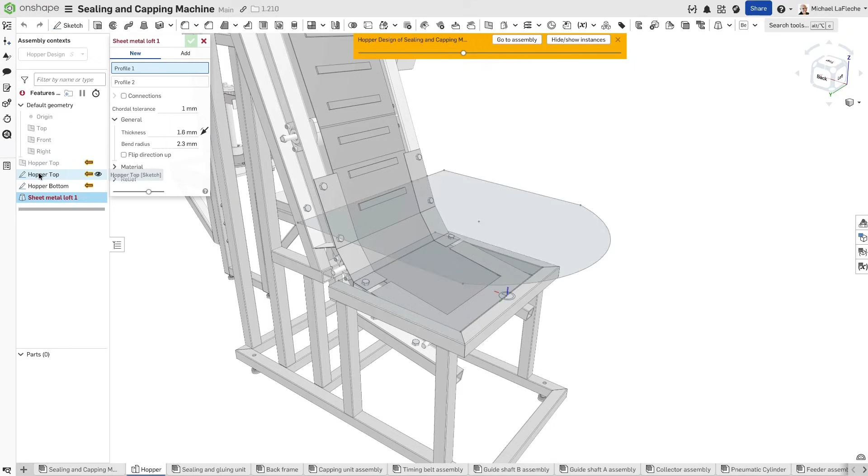In this case, I'm in context in a part studio, and I'm going to isolate the area that I want to work with. I have two sketches, one for the top and one for the bottom profile of the sheet metal loft. I can select them from the tree, or from the graphics individually.

You can notice that we have the flat pattern view with score marks with a chordal tolerance of 1 millimeter, but this can be adjusted to get more fine score marks on your flat pattern. All right, let's go back to 1 millimeter chordal tolerance.

Notice that you can also select where you want your ripped connection to be. We did not need to predefine this in the sketch.

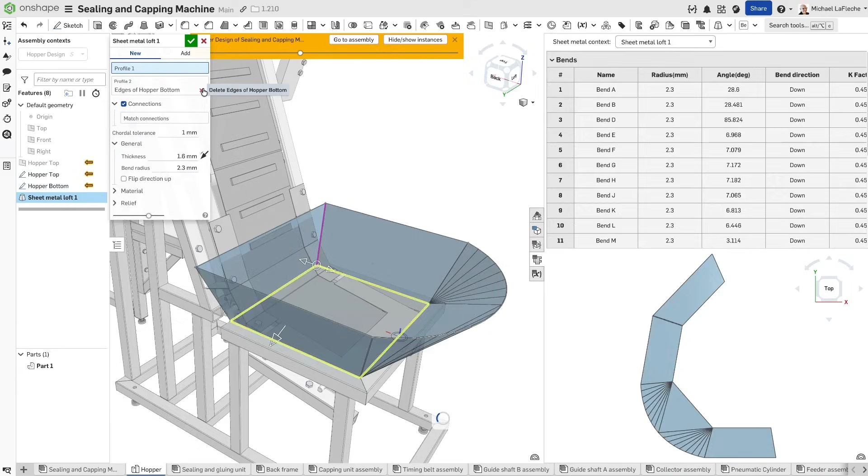We can also select things with manual selection of each entity. If we wanted this to be an open profile, we can create a grouping of three edges on the top, and in this case, three on the bottom. Onshape will calculate the flat pattern as we make our selections.

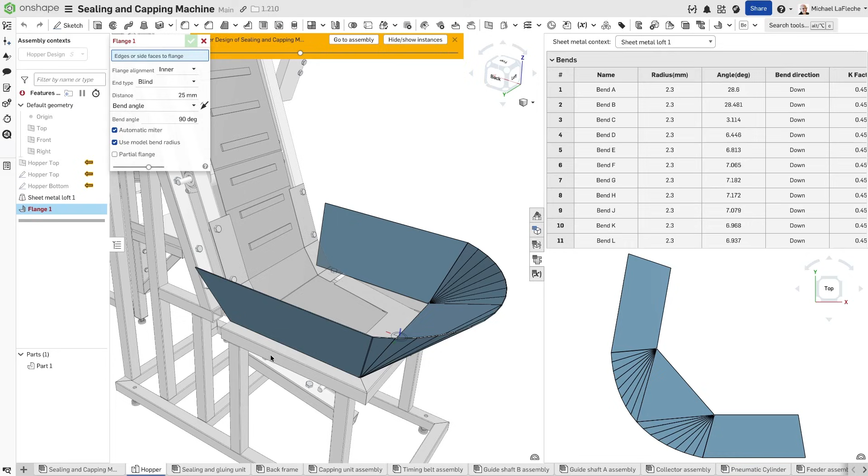Also note that other operations can now be created with this, like a flange, a common operation to mount this hopper to some other piece. All the normal sheet metal commands will work. You can work just like you normally would.

Other types of features can also be added directly to the sheet metal geometry or the flat pattern, such as cuts, forms, and other features.

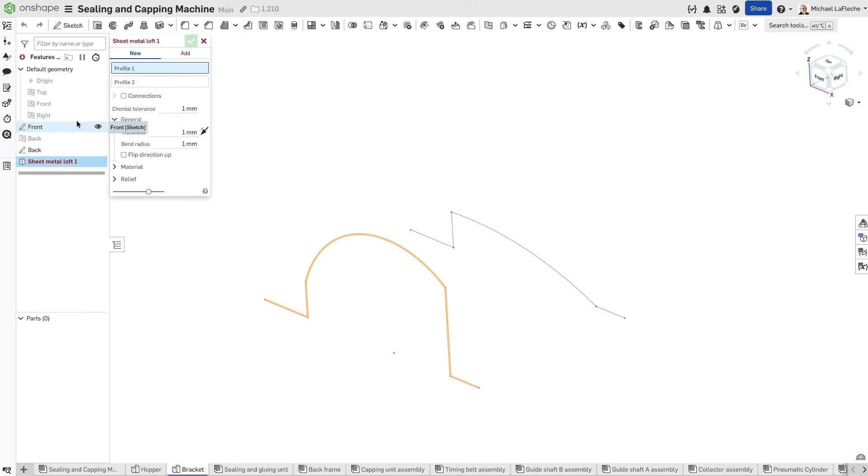You can also create lofted brackets with this method, an approach you might not normally use for sheet metal design. So here, notice that I can select two open profiles, select the chordal tolerance of my choice, and create a very advanced bracket very quickly.

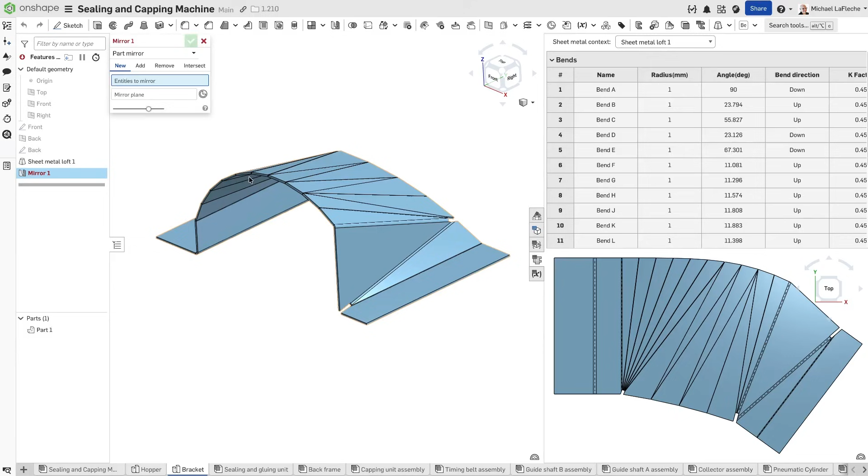But it doesn't stop here. We can also work in a multi-body fashion with sheet metal lofts. In this case, I'm going to mirror the entire part and offset it by mate connector at 10 millimeters from the bottom, so we have two pieces.

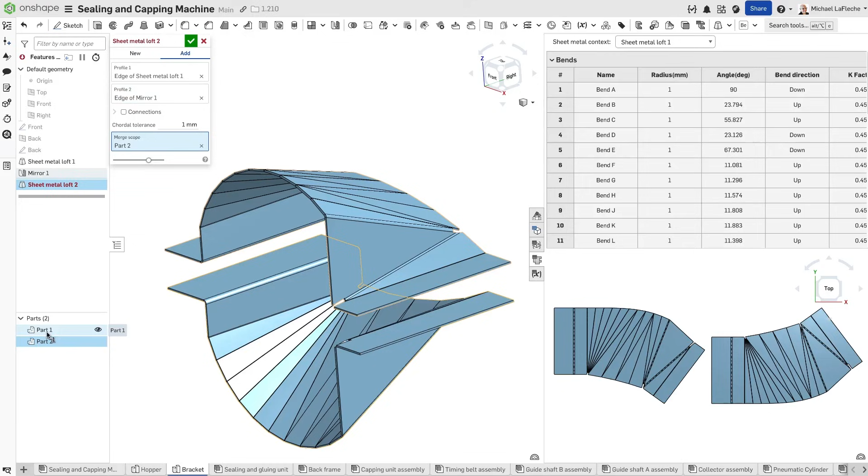The sheet metal loft tool has an add function, which will allow you to connect one or more lofted bends together. So as I select two edges from two parts and choose the add option, I can choose the parts that I want to merge with under the merge scope.

And we have a flat pattern for the total combined piece. In this combined piece, we can create other geometry right on top of it. In this case, I will create a cut to receive an adapter in the center of this new face that was created by the combined sheet metal loft.

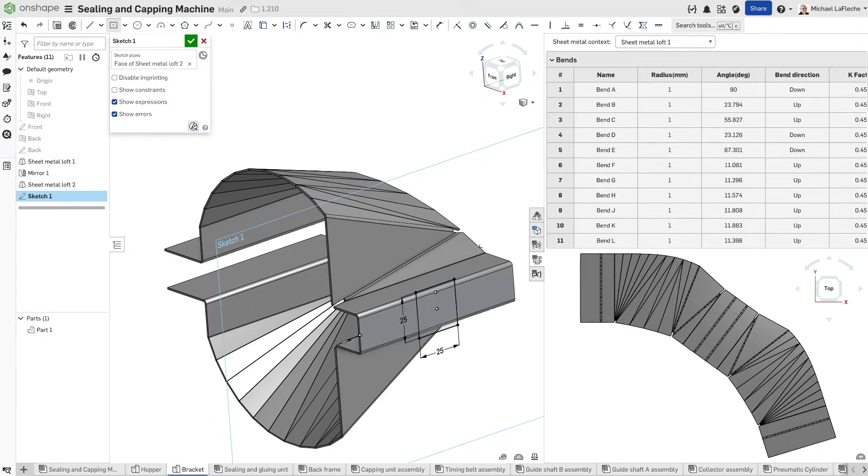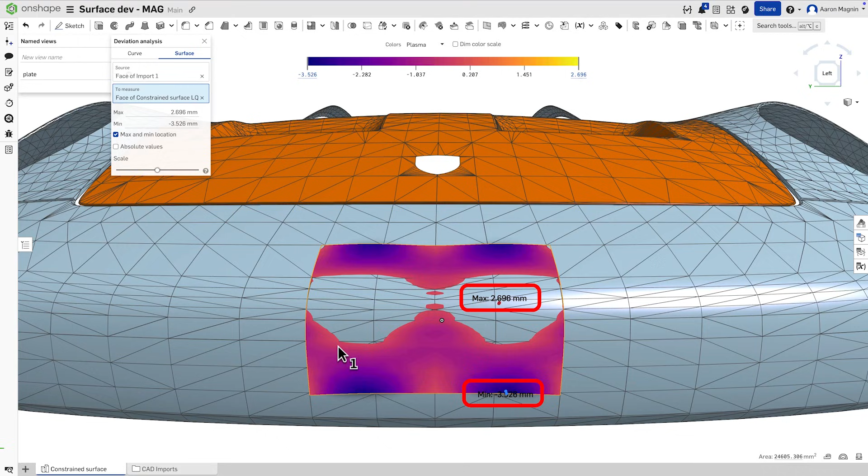Introducing Onshape's new Surface Deviation tool, a faster, more intuitive way to compare surfaces and evaluate accuracy in your designs. This tool lets you instantly measure the minimum and maximum deviation between two surfaces, helping you verify fit, reveal imperfections, and ensure manufactured parts will match your intended geometry.

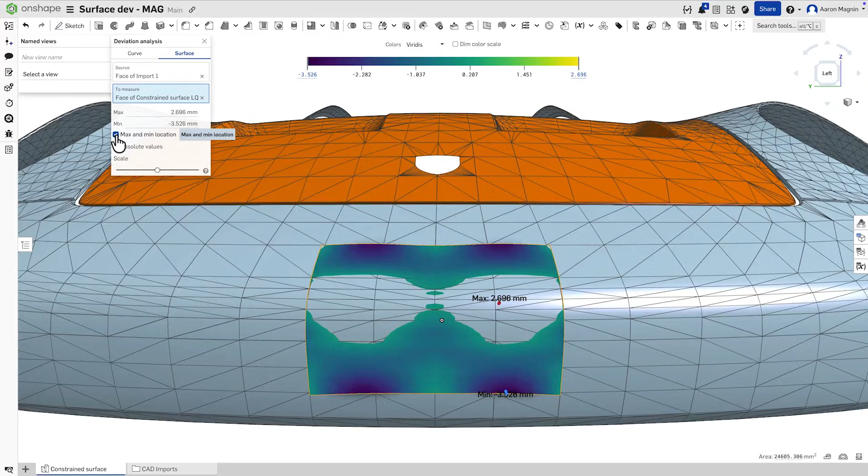With a color-mapped visualization, you can quickly identify areas that fall inside or outside your acceptable range. To help interpret the results, you can change the style, adjust limit filters, dim the color scale, display max and min locations, and more. Surface deviation builds on the familiar workflow of Onshape's curve deviation analysis, but now extends it across full surfaces, giving you clearer insights into tolerance-sensitive regions.

No matter what the goal might be, this tool gives you precise visual feedback.

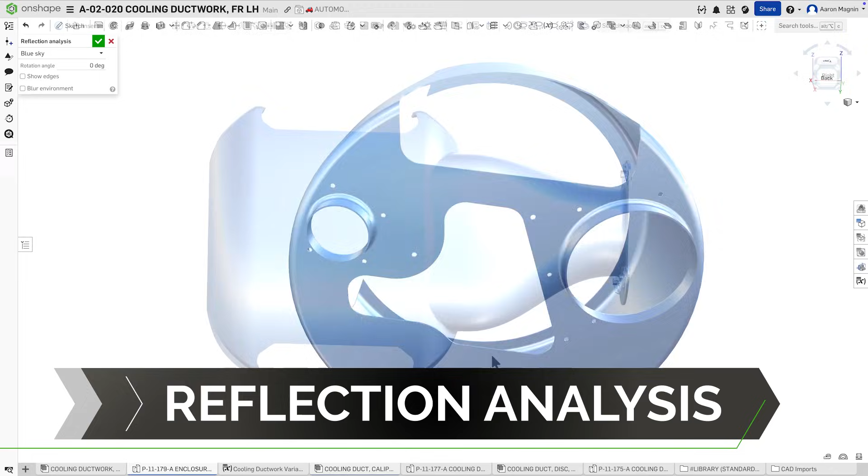We're excited to introduce a brand new visualization tool in Onshape, Reflection Analysis, to evaluate surfaces on your parts and assemblies. With reflection analysis, you can instantly switch your model into a special reflective mode.

This makes it easy to spot subtle surface issues, highlight curvature transitions, and understand how your design interacts with light, all without changing the part's actual material. Utilize one of 11 environment map presets, I'll demonstrate several, to accentuate surface imperfections for clearer detection.

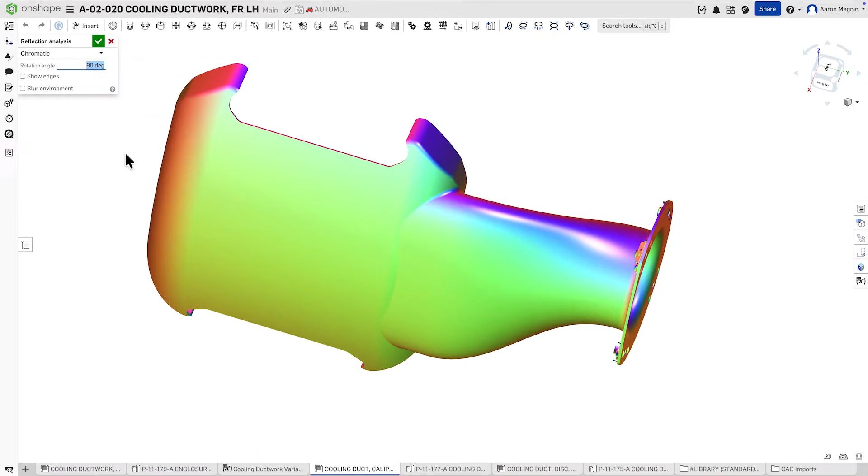And to keep your workflow fast, you can jump in and out of the mode using customizable keyboard shortcuts. Whether you're fine-tuning cosmetics, checking surface continuity, or validating overall quality, reflection analysis gives you a clearer look at your design.

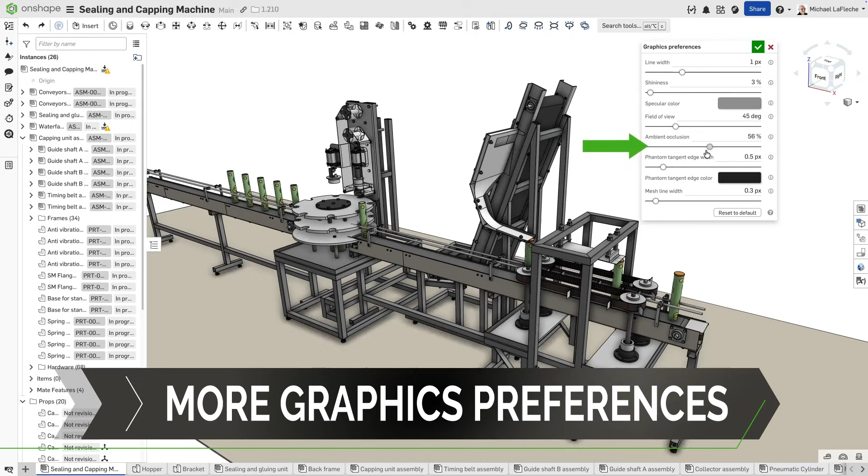Additional graphics preferences options have now been added, including ambient occlusion intensity as well as phantom tangent edge width. For ambient occlusion, this will provide you with a nice way of showing shadow effects on your design. If you want a clean design, you can just crank it way back down to 0.

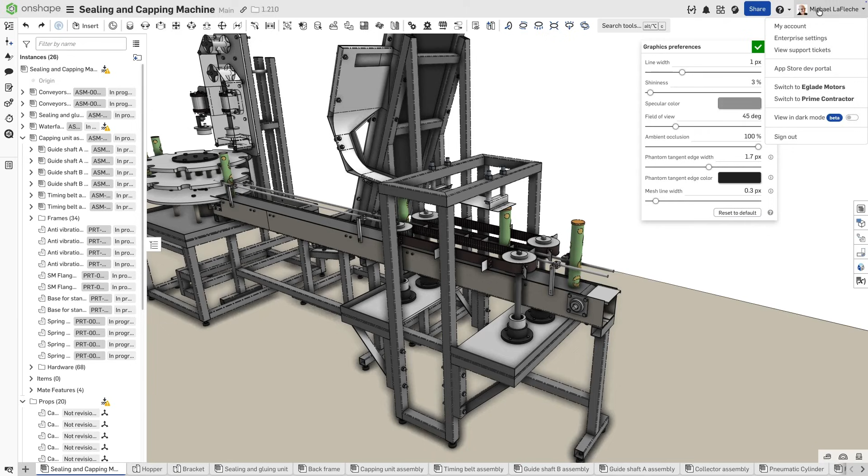Phantom line tangent edge width can also be controlled. Just make sure you have that display mode turned on to see the result. Of course, everything looks great here in dark mode as well.

The color of the phantom line can also be controlled to really make it stand out or not stand out. Finally, the width of mesh lines can now be controlled on imported mesh type objects.

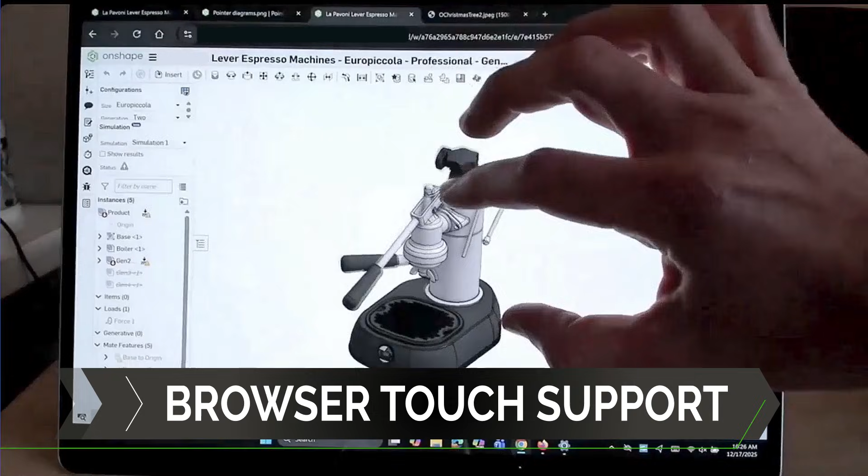Touch support is now enabled on supported devices such as this Microsoft Surface tablet. Notice how you can interact with the display of the model just by using your fingers.

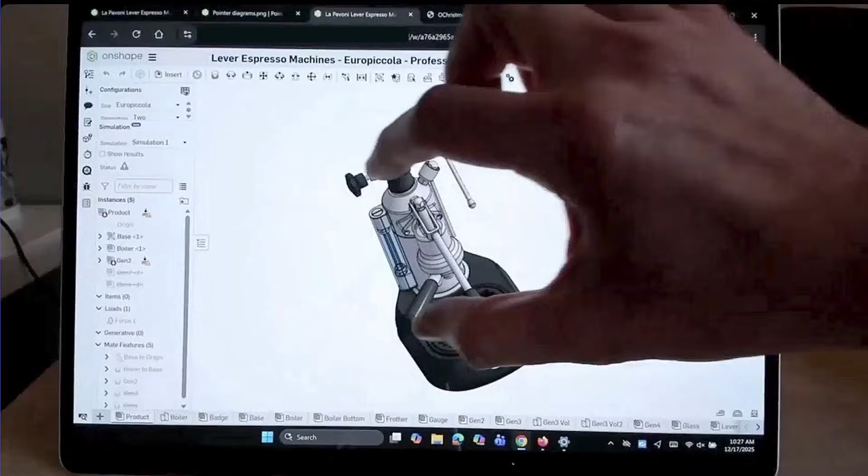Commands have always been able to select a single input selection with your finger, but rotation was never supported until now. One finger will rotate the model, two fingers staying in similar distance will pan, and two fingers with a pinch motion will zoom in or out.

Rotation can also be done by rotating two fingers on the screen.

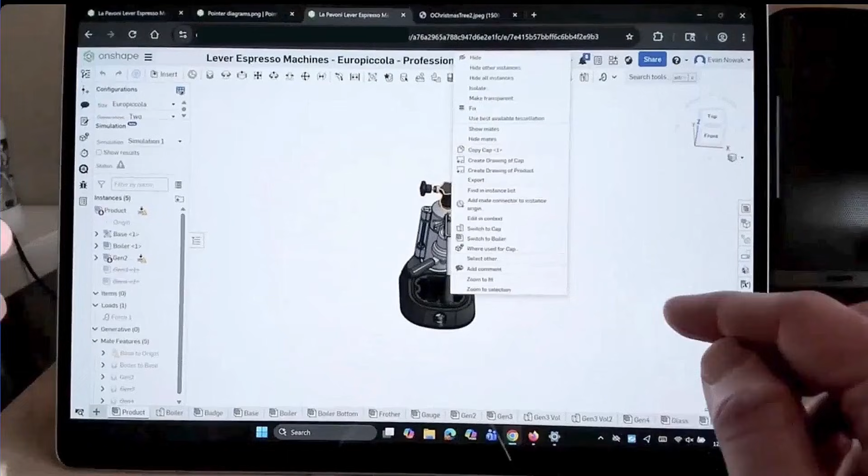Selecting anywhere out in space or hitting the space bar on the keyboard will unselect any options, but you can create a selection by holding down for a long moment with two fingers and creating a selection box. This should work with any web browser on any touch-enabled device.

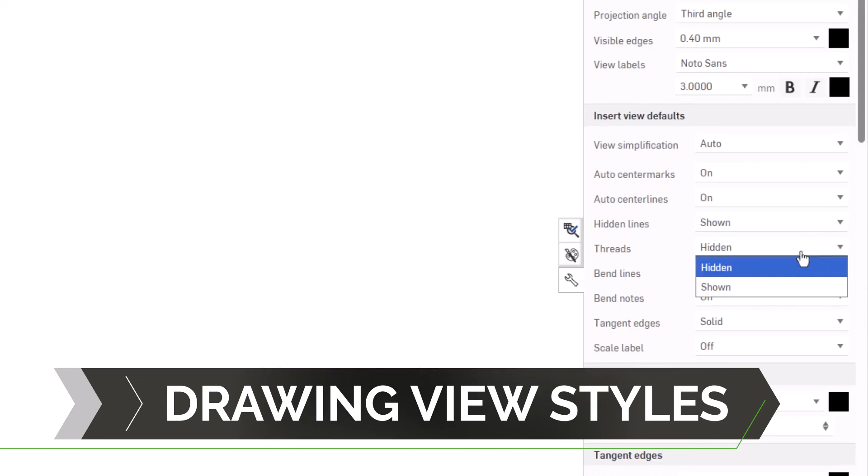Onshape now enables you to define several defaults for new views created in your drawings. This can be defined at the template level to ensure all of your drawings use these new settings moving forward. This will save users a lot of time in creating drawings by eliminating the need to manually change view settings repeatedly, instead focusing on the unique needs of each view.

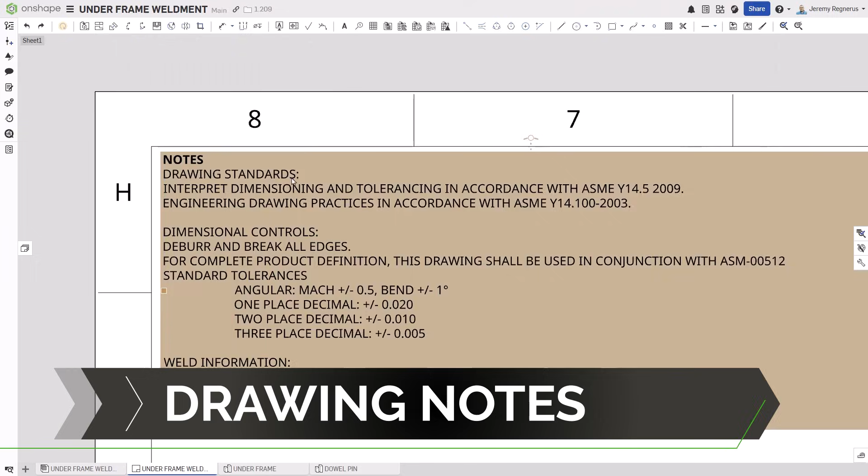When you create multiple numbered lists in a single note in Onshape, each item continues where the last number left off, even when there is separation between the individual lists.

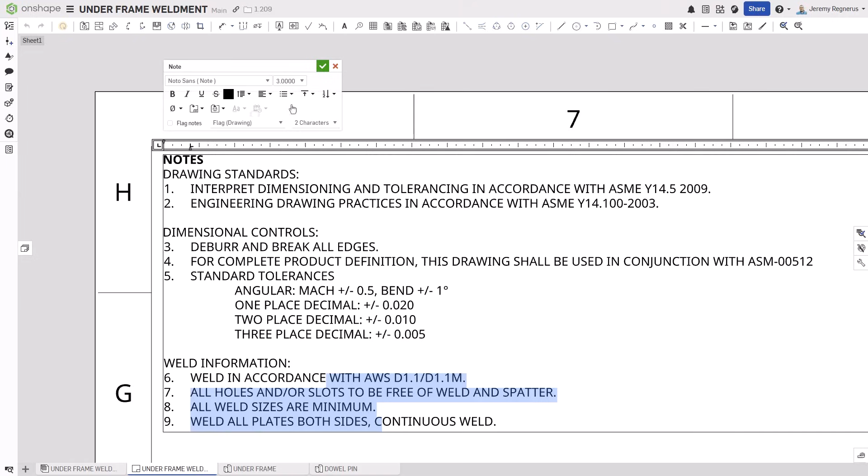New for this release of Onshape is the ability to intermittently modify numbered lists and manually override those values. This allows any item in the sequence to start from a different number, for instance creating a completely new list starting from 1 again. You can even choose and manually enter a completely different numbering scheme for each list.

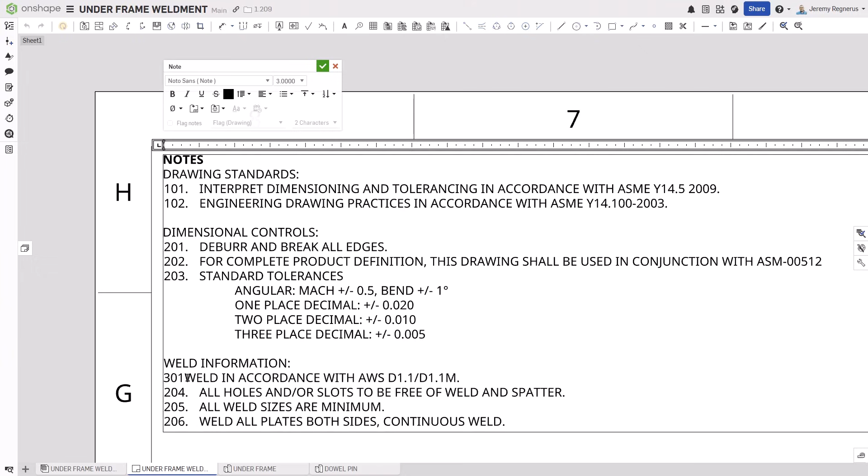This is useful when your documentation requires categorized or group note numbering for different operations and procedures. This enhancement makes it easier to follow company standards on drawings without having to create separate notes that contain separate lists.

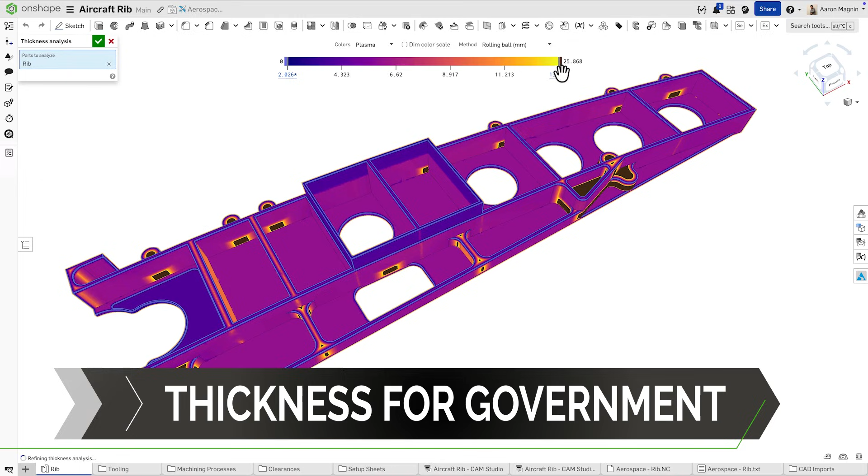Onshape Government Enterprise now includes thickness analysis, giving government and defense users powerful tools to validate manufacturability with confidence. This capability is a game changer for designing plastics, molds, and any part where consistent wall thickness is critical. Simply select your part, and Onshape automatically provisions the compute power needed to generate results.

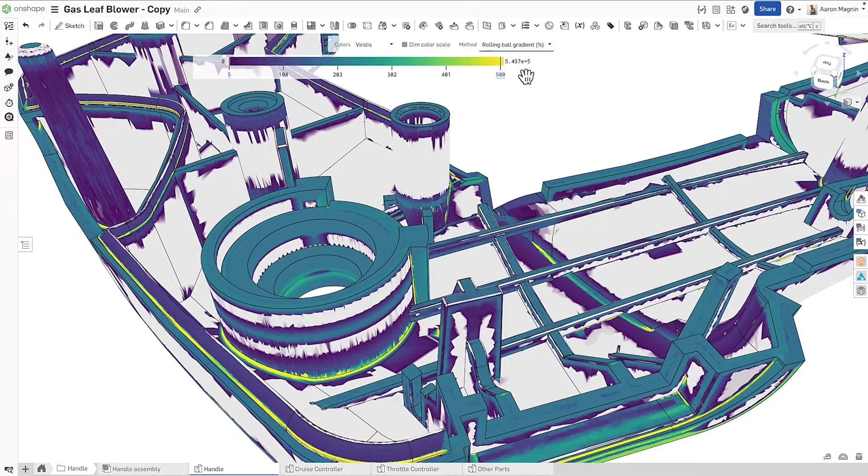Choose between rolling ball thickness, the industry standard for evaluating material distribution, or ray thickness, a fast projection method that highlights areas outside your target range. Thickness analysis integrates seamlessly into your Onshape workflow. Inspect, adjust, and optimize designs for manufacturing efficiency today.

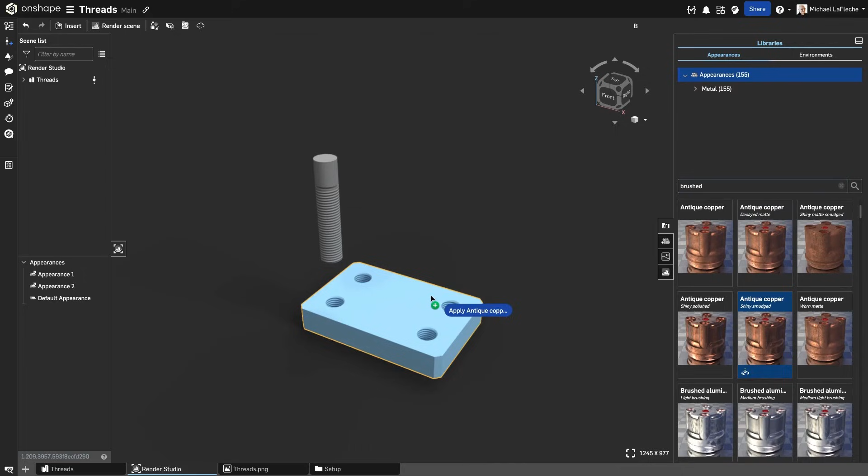Cosmetic threads applied to shafts and hole features now will automatically propagate to Render Studio. Simply insert Part Studio or Assembly in Render Studio, and the cosmetic threads are already there. And when applying other materials to them, they will adapt to the texture automatically.

Now from the view cube, if you accidentally move your view, you can now get back to the previous view setting without having to go to a previously defined save view. Simply go to the view cube, pull down, and choose Previous View.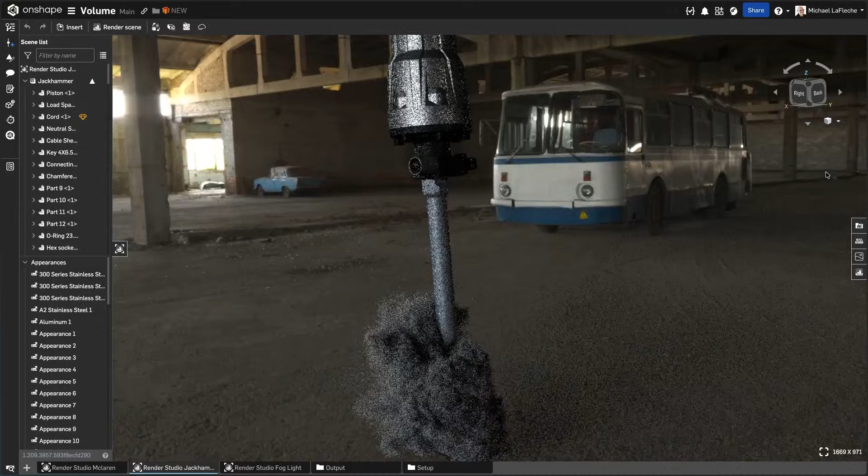Adjusting the field of view or focal length changes the scene perspective, and no longer does it change the camera or model size. The model remains roughly the same pixel size while the surrounding perspective shifts, creating the effect of a wider or narrower camera lens without scaling or repositioning the subject.

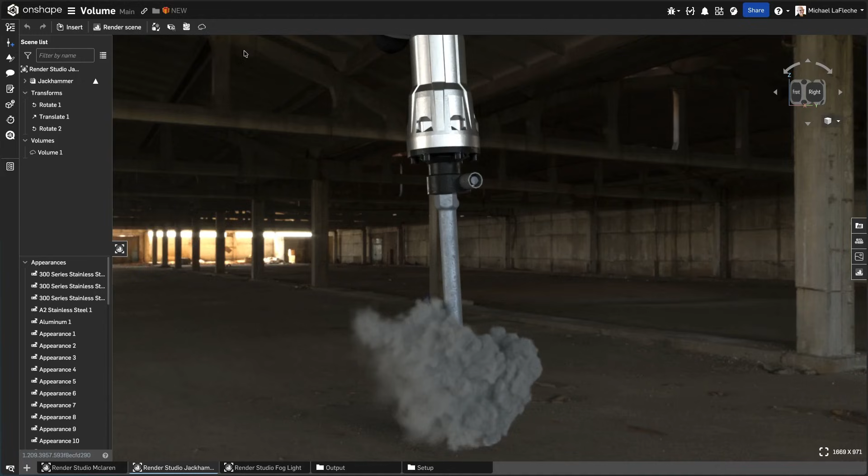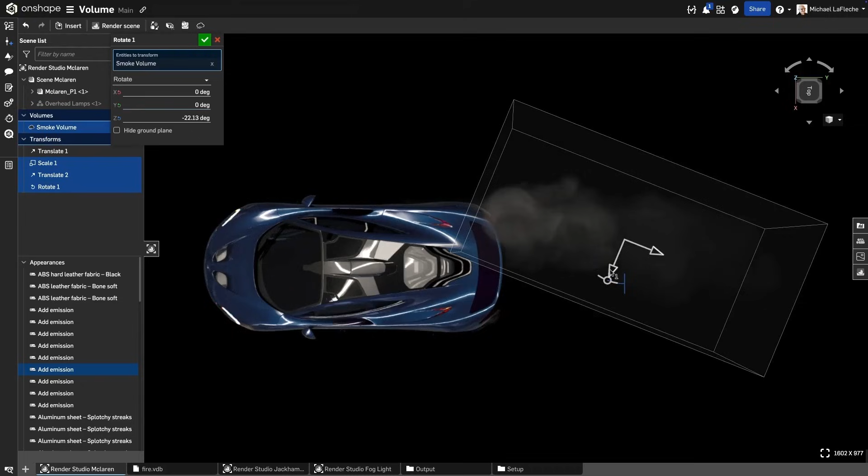Volume entities such as this applied smoke can now be moved using the transform function in Render Studio. Just pick the type, in this case a translate. I will go down in the y-axis a little bit, get it centered. By the way, you can also use rotate and scale. Here's rotate. I can rotate this volume entity just like any other object now in Render Studio.

Onshape Render Studio Advanced now supports appearance masks, which is useful for creating selection sets and working with layers in other post-processing applications for rendered images.

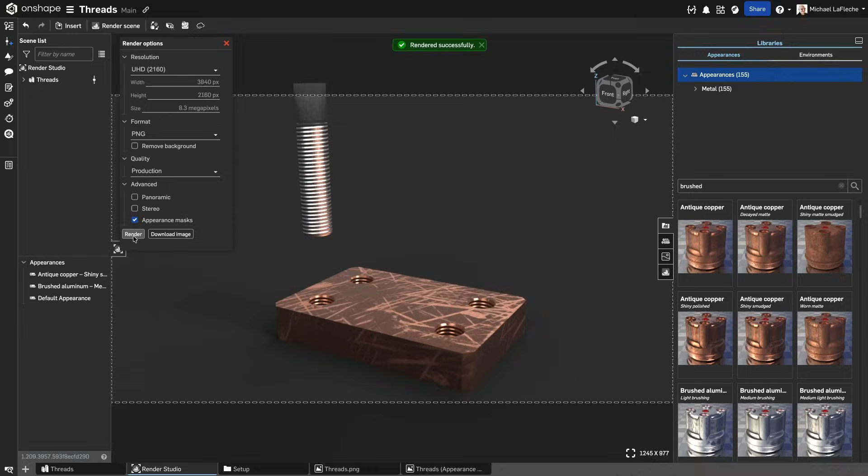Here, simply choose Appearance Masks when performing the render, and Onshape will add the Beauty render, the original, as well as the Appearance Mask render as tabs in the bottom of your document or in your Downloads folder. Here is the original. Here is the high contrast appearances option. And here I am in Photoshop choosing to reduce the opacity of that layer.